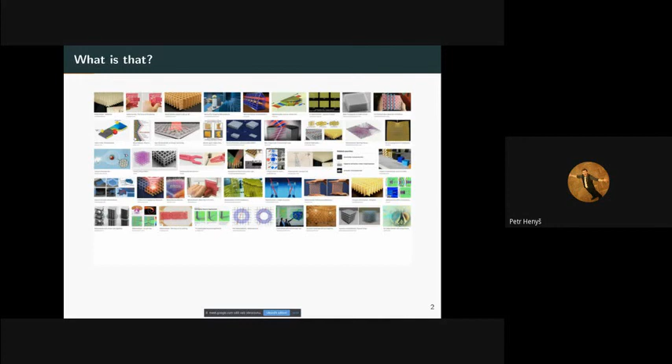So that's the good thing, and the bad thing is actually how to design it, right? I just mentioned that we mostly control the metamaterial properties by geometrical and topological properties. It means that we design a lattice, and this lattice has some properties, and now we should define how to design, right? How to connect the lattice properties with the resulting mechanical or, more broadly, physical properties.

That's the most difficult part in metamaterials, and it is largely unexplored in the scientific community. And of course, this is a very hot topic which is now really quickly progressing. We may split the design of metamaterials into two main parts, right? The first part is how to explore the design space we can use for our purpose.

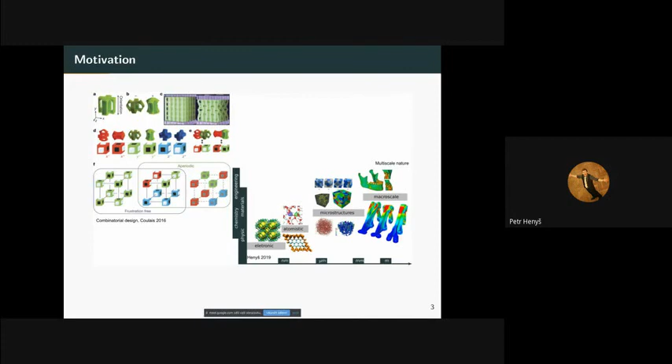So for that part, we need to somehow couple those two scales to precisely evaluate, as I said, the physical properties of our design and metamaterials, if it does what we really wanted it to do. And for that, we could use another approach, which is called the multi-scale approach.

And this approach is a more broad approach, which actually tells you that you will see your model in multiple scales, either temporal or spatial. But in our case, we will use it exclusively as a computational approach, which means that we will have a computer model of a metamaterial, and we'll try to simulate and evaluate its properties at at least two scales. That's why we call it multi-scale, right?

But this is generally quite a difficult task, and even more difficult in the computational domain. So mostly we will use the multi-scale approach to evaluate and design a microstructure of metamaterials. For example, if we design the lattice structure, we can immediately infer the elastic properties of the lattice unit structure, and see what it exactly does and what mechanical properties it has, right?

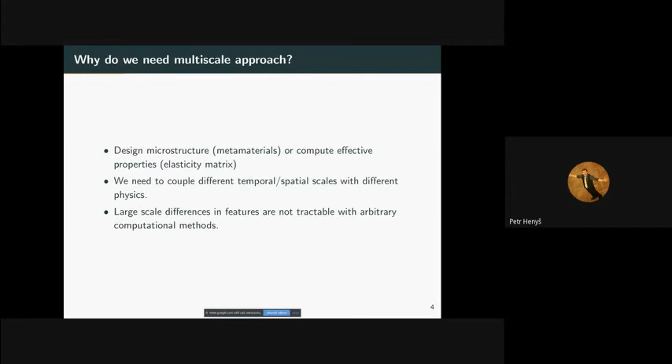So also we have some boundary conditions. If we talk about the computational model, those boundary conditions are very usual, right? So you need to somehow fix the model, not being floating in the space, and also we need to somehow load the model to know how our model reacts to the loading, right? Which is called in our case omega Neumann boundary conditions.

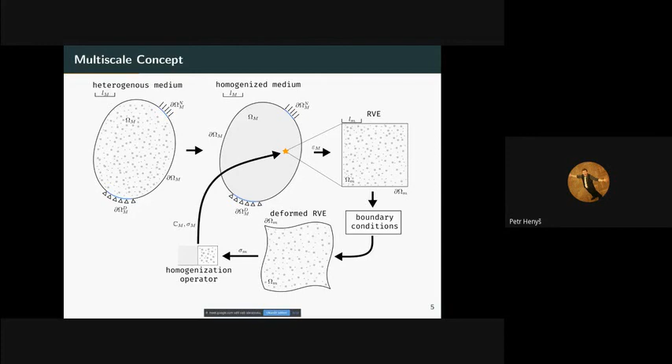So before using a multi-scale approach in metamaterials, we need some assumptions, right? The first assumption is that the first order homogenization we use is actually scale independent, which means that we can model efficiently only two scales which are really far from each other. It means that the macroscale is much bigger than the microscale. And also the features in the microscale should be smaller than the scale of the representative volume element.

Actually, the truth is that we don't have to fulfill those conditions, right? It will still work, but it will not give us the right results, because once the scales approach each other, one scale can influence the other, which is not taken into account in first order homogenization. In other words, it's not able to distinguish between the scales. It is because, as you've seen, the RVE can be really big, but still it's not influenced by the macro model.

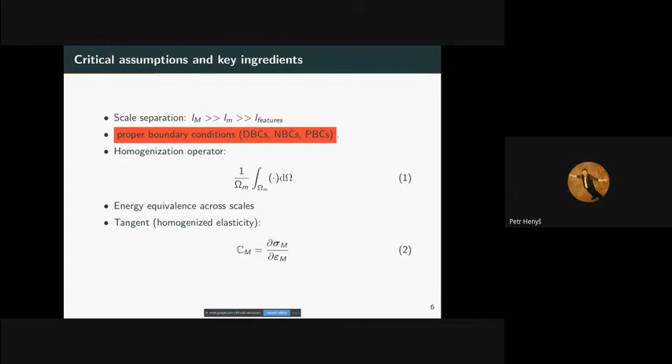So if we want to apply our periodic boundary conditions, as I said, the periodic boundary conditions are really effective even for non-periodic metamaterials, and of course very good for periodic metamaterials. And one can take them as a compromise between the Neumann boundary conditions and the Dirichlet boundary conditions. And the reason is the following.

If you apply the Neumann boundary conditions, your displacement-driven finite element model is always underestimating the resultant elastic properties, while the Dirichlet boundary conditions overestimate the stiffness, which means that we can see them as a lower and upper bound of the stiffness properties of our computational model. And what is interesting is that the periodic conditions are the best reflecting conditions for having the most realistic and least biased elastic properties, right?

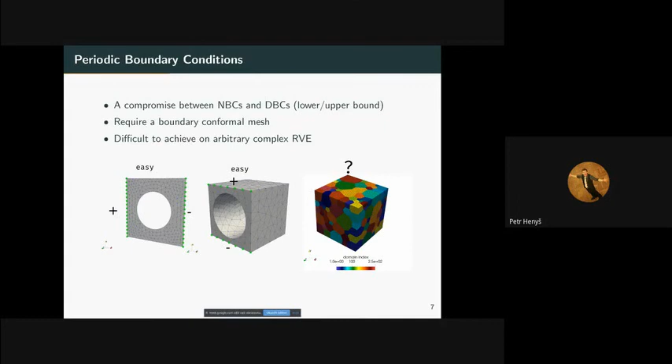Well, let's start with some simple math, right? This is just an example of a very simple linear elastostatic model, where the equations of the Cauchy continuum and the boundary conditions are defined on a very simple 2D planar model. And what is more interesting is the definition of the boundary conditions controlling the periodicity.

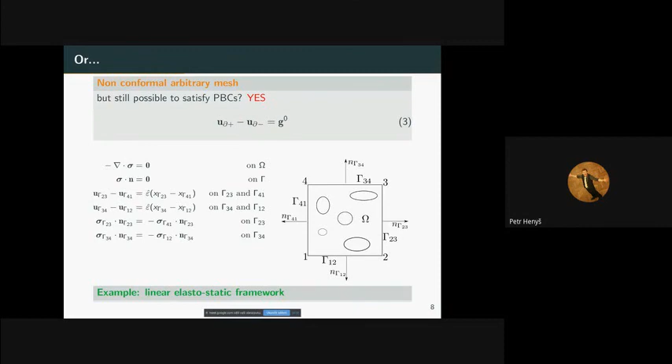So we have several options how to force our model to consider the displacement field being periodic. We can use a method called a meshless method, which stands on the interpolation of the displacement field on the boundaries, which is quite robust, but it has some drawbacks. Or you can work with methods using finite element discretization, of which the most known we call the mortar method, which is very well known in contact mechanics.

And there is another method we try to apply, we call it Nitsche's method. And this method, like the mortar method, tries to handle the periodicity constraints in our computational model weakly, right? Weakly means that you try to satisfy those conditions in average, not precisely, but just in average. I think this has some interesting consequences.

Just to briefly show what's going on in meshless treatment. It is kind of an interpolation. You take your displacement field on the boundaries and replace it by an interpolator with some well-defined basis functions. The same interpolation you obtained on one side, you use for the opposite side. Then you actually get the same displacement field on both sides, no matter if the nodes are conformal or not, right?

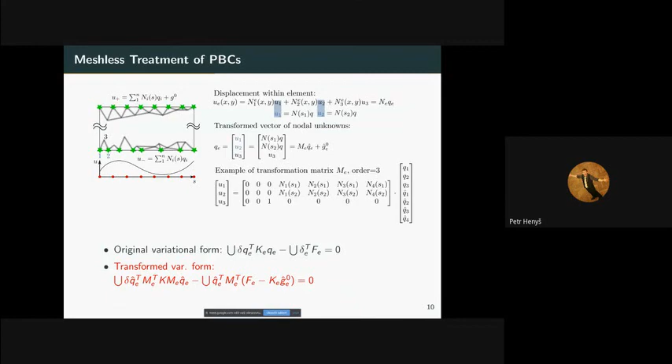Well, just briefly to the mortar method, I will first define two very useful operators. I will not every time write u plus minus u minus, so I will put it in one symbol, and we call this symbol a jump, because it is basically the definition of the jump in the field. If u plus and u minus are not the same, you get a jump. What you want to do is minimize the difference between u plus and u minus, right?

And there is another very useful operator, we call it an average operator, or even a weighted average operator, which says what is the relation of the stress on both sides. Once we define those two operators, we can define the elastic energy of our representative volume element of our metamaterial unit.

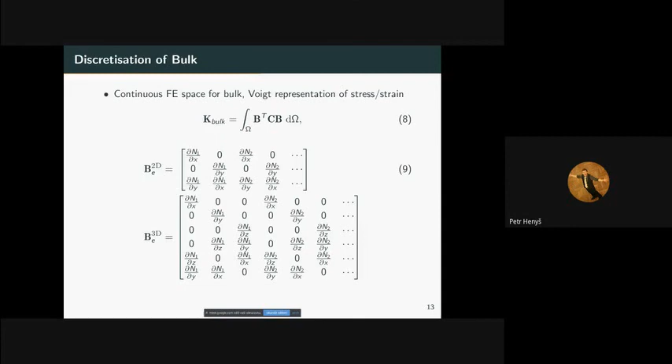And now I will just briefly describe how to integrate quantities of interest on a non-matching interface in 2D and also in 3D. Well, if you have two non-conforming meshes which together produce an interface, either 2D or 3D, of course immersed, and you want to work with the weak PDEs, then you have to be able to integrate on these interfaces. And this is also not really easy, and it's well known. It's a nightmare in contact mechanics.

And here we propose a method using something called an intermediate surface, or edge in 2D, which is used to integrate those values. If you integrate your weak PDE, you need to integrate numerically. You don't have any choice. That's why you do finite element discretization. And you usually integrate in Gaussian points. But now you have two surfaces which are not conformal, so your Gaussian points are also not conforming. So you need to know the Gaussian point on one side and its correspondence on the second side.

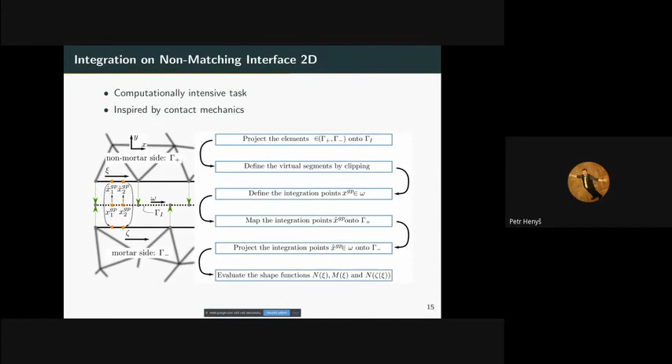Well, in 2D, it's quite easy. You can use many tricks from computational geometry, but in 3D, it's much more challenging, because now you don't work with just a simple edge, which you can simply segment, right? You can make more segments from that, but now you have some intermediate surface, and this surface contains an object, which is basically a projection of one element from one side and the element from the other side. And then you need to find the intersection, right?

But still, it's not enough, because if you have an intersection of two, let's say, triangles as here, you will get an object which is not a triangle anymore, it's a polygon. And how to find a suitable Gaussian integration scheme of a polygon? Well, the simplest way is to discretize this polygon itself into triangles, which is quite easy. We just get the center of the polygon, then draw straight lines to each vertex of the polygon, and we'll get quite precise integration of this.

So this is the additional step you have to do in 3D, and then you can use the well-formulated Gaussian integration on triangles to get the exact integrals in your weak form of the PDE, right? This is the only difference in 3D. It is more challenging from the computational geometry side, because you have many choices of what could happen. There are many situations of how the triangles can be intersected. They can be fully intersected, partially intersected, and for each case you have to write a new case where you have to be very careful what you should do, right?

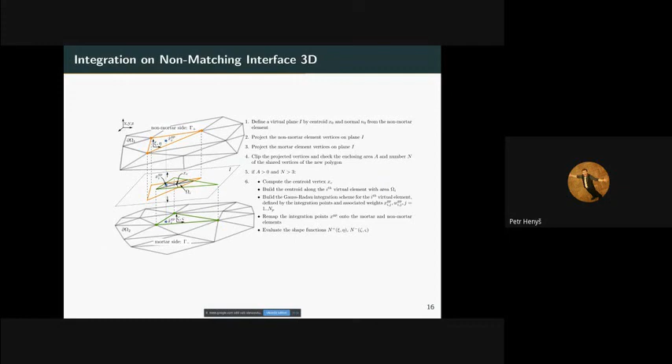Well, so let me briefly explain some tests, some benchmark models, which we used recently. Firstly, it's not concerning precisely the metamaterials. I use it in another study. If we have time, I could also introduce that. But the first model is kind of a composite. The second model is a coupling of two scales, right? By the way, the methods introduced are the meshless one, the mortar method, and the Nitsche one.

Regarding the meshless, we use Lagrange polynomials for interpolation of order 3 to 6, right? And in some cases, we also use splines instead of Lagrange polynomials. The splines are much more flexible, but the truth is that they are a bit more computationally intensive.

Well, in case of the mortar method, we needed to find suitable finite elements, actually the interpolation elements of the multipliers and the displacement field, and we found that the compatible spaces are Lagrange polynomials of the first order for both quantities of interest, and we use a Gaussian integration scheme for 2D as well as for 3D; in one case it was 3 integration points, and in 3D it was 5 integration points.

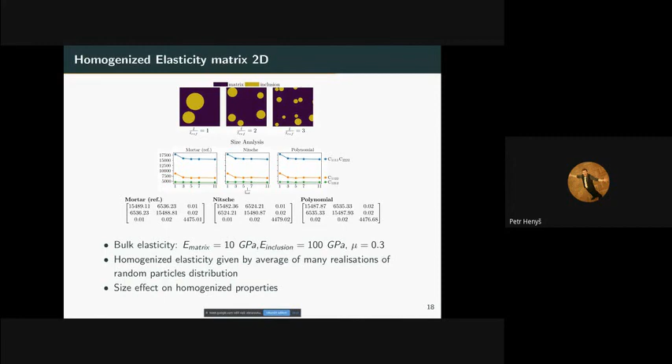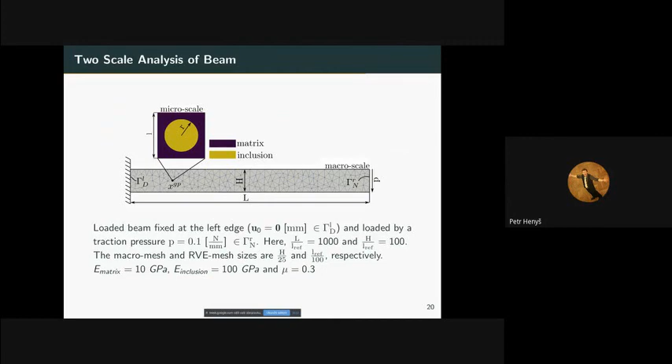Well, if you want to couple two scales, for example, a very simple example of a beam which is composed from a very simple unit, which can be considered also as a metamaterial with hard inclusions, then you can build up a scheme which is nothing more than providing communication between the macro finite element model and the micro finite element model, right? Once you apply the deformation in the macro model, you put it inside the micro model, and from the micro model you get the elastic constants as well as the stress field, and this goes to the macro model.

For nonlinear elastic properties, if the micro model is nonlinear, you should use some iterative scheme to get the equilibrium in the macro model. If it's linear elastic properties, then you can just compute the micro model once, right? And the elastic properties and the stress will be the same for every loading, because it's independent of the loading path, because it's a linear one.

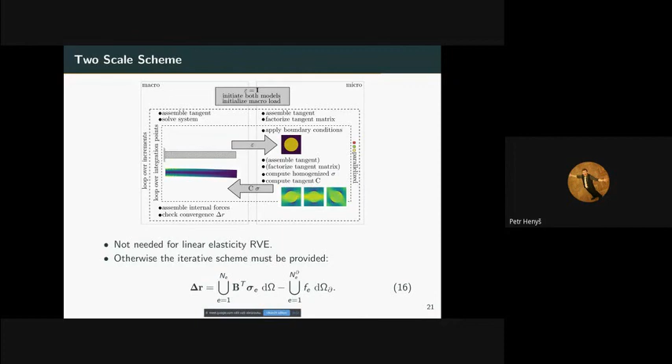And there are just a few illustrations for the methods. So what you see is just a very simple cantilever beam which is bent. And you will ask, okay, I see the macro response, right? I see where my stress is, where my deformation is. That's obvious, but that was not the reason why I computed the two coupled scales. I want to know precisely what happens at my micro scale, right?

Okay, I see it, because I actually couple those two scales. So now I see what happens around my inclusion at a scale which is much smaller than the scale of the beam itself. This is the reason why we use that method. So now you can see not only the macro scale, but also what happens inside your metamaterial or composite domain.

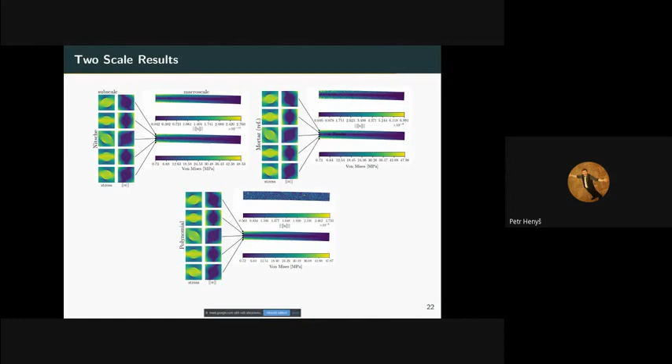If I were to compare those methods, I would say that of course our method shares some parts of state-of-the-art methods in literature, mainly the mortar method and the meshless one, and actually removes most of the disadvantages of those methods. With respect to the polynomial interpolation from the meshless method, it doesn't modify the sparsity. The sparsity is well preserved, so using standard solvers of linear systems is very efficient. With respect to the mortar method, it doesn't inflate the matrices, the system of equations, because it doesn't contain any Lagrange multipliers.

And with respect to the penalty method, which could also be used, it has the advantage that for certain kinds of finite elements we can find a lower bound of the penalty term used in Nitsche's method. So everything is actually automated. You don't have to care about how to tune or how to set up your model. It doesn't require any manual setup.

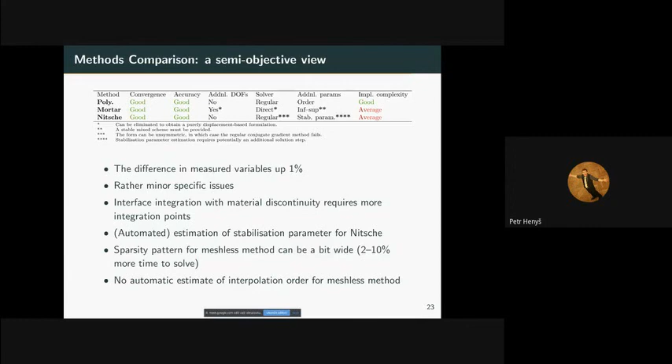But of course, there are always many improvements you can make. Now we demonstrate our solution on a linear static problem, which is very often used and very sufficient. But more multi-physical problems could be solved too. As I said at the beginning of the presentation, the coupling of different physics and different scales will be much more interesting.

And our estimation of the lower bound in Nitsche's method is now, I would say, half and half. I mean, half of it is mathematically rigorous, and the other half is estimated empirically, and this is just due to a lack of efficiently analyzing some mathematical properties of the Nitsche form we defined.

And of course, very often you find that fulfilling the criterion of scale separation is not simply possible, which means that one scale is affecting the other scale. In that case, we can use not just the simple linear homogenization we use here, but higher-order homogenization, which allows us to also include size effects in our micro and macro model.